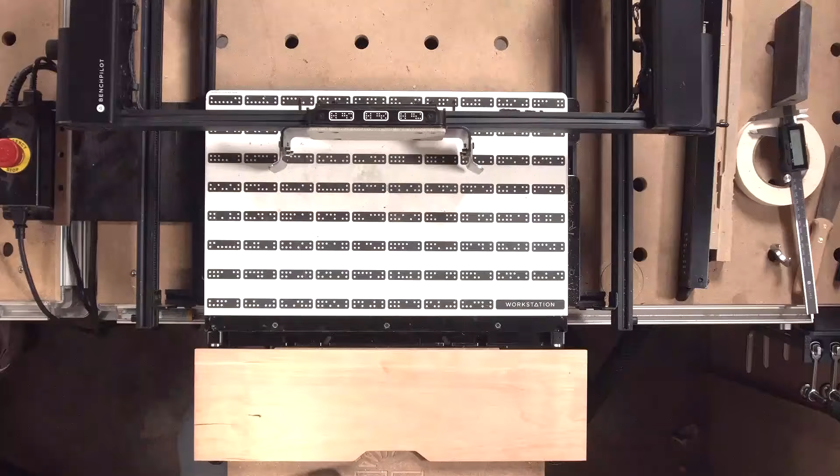So, start off, I've already scanned in my workspace here. What we're doing is we have a drawer front with this tiny little handle that kind of made it look like a manila envelope or something. We didn't quite like this design. It was a little too shallow to actually get your fingers in and open. We want to change that. So, first start with a scan.

Yeah, and this was something we built without Origin. This was just a drawer front that I cut and built in the wood shop. And then, let's say it's a prototype. We're digitizing it. We want to make a new one, but we didn't have the file in the first place. This is like a workflow to take something out of the real world and turn it into a digital format so you can reproduce that over and over with precision.

So that's the way I like to think of probe points: you're normally starting with something in the real world that you don't have the file for already. There's plenty of jigs, plenty of things where you just want to make sure you can map all of the features on the wood so that you can get it into Studio or other digital programs for further manipulation.

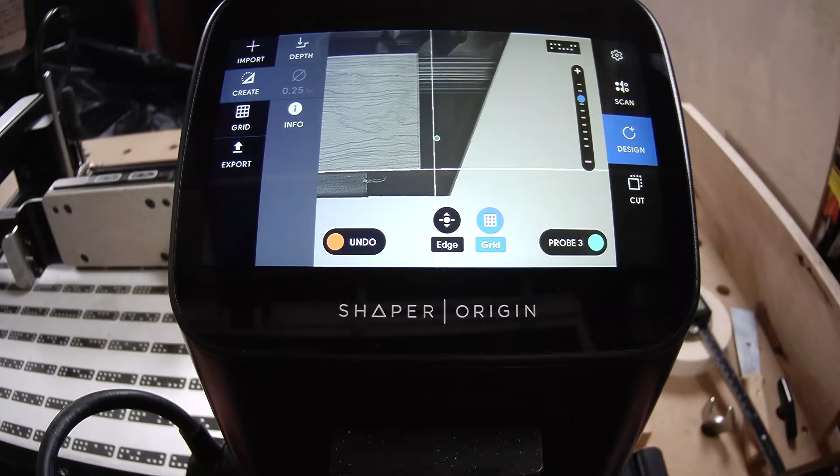Yeah. Okay. I'm going to start off with a probe rectangle just to find the exact center of my drawer box. Yeah, so here we're going to actually combine probe points with probe rectangle. And so we'll start with probe rectangle because that's going to give us the envelope of this drawer front. And it'll also put a grid in the middle. So now we have the boundary of that piece of wood plus the center grid, which is great because when we go to Studio, everything's going to be aligned real nice.

Now, the important part here is we want to use this new probe points feature. And actually, one thing we should note, probe points is a labs extension currently. So if you don't see it in that menu, you're going to go to the settings. Let's jump over there so we can show people how to get there. Go down to extensions and find the probe points thing. And you just need to make sure you click enable.

If you click on the name of the feature, then it'll take you to a page where you can click enable and then it'll show up on tools. So this is kind of an extra extension currently on the Oakland release. And all those labs features live under create.

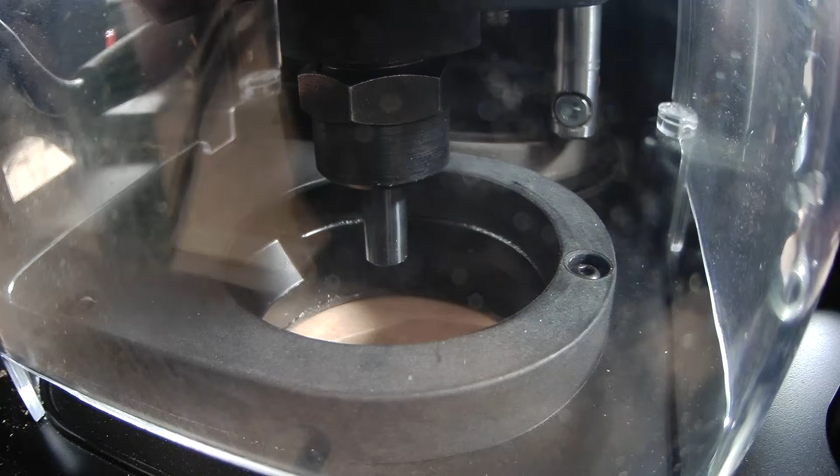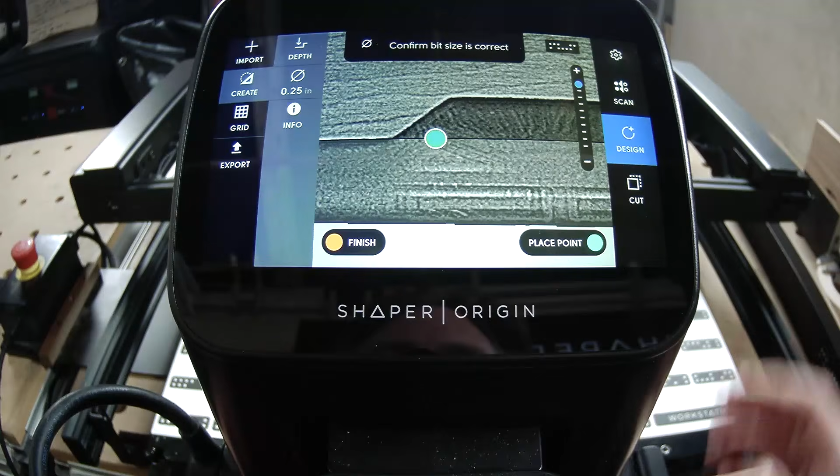So I'm going to start it off, much similar to a grid. I have our engraving bit in backwards, so it's just a solid 1/4 inch shank. And I'm lowering that down just below my surface. Yeah, and the idea here is just to take a bunch of points on these parts that weren't easy to use with probe rectangle. So this is kind of essentially a trapezoid.

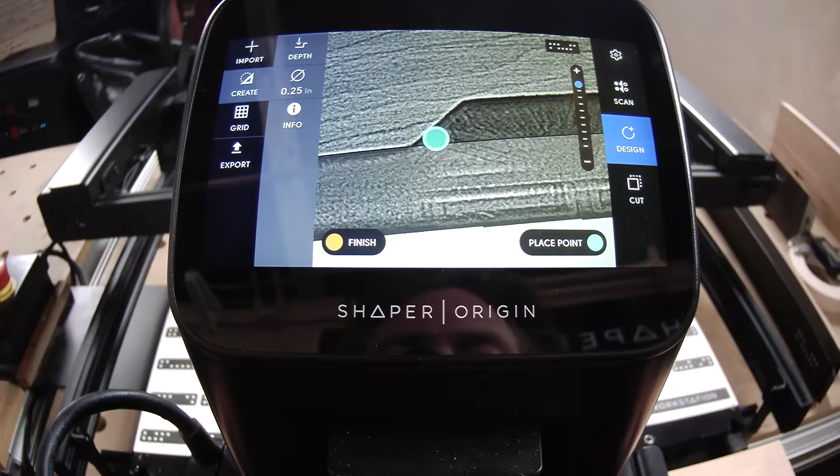So we'll essentially take a couple points along each line so that we can rebuild that and then get a change to happen in Studio to change the format of this shape without having to try to guess the alignment or figure out where these things might go. Taking these points out of the real world means when we modify in Studio and come back to Origin, everything's going to line up exactly where we want it, which is a really, really cool feature of this.

Sweet. So I got my 6 points down, really just 2 per flat section, so that I have 2 reference points for each straightaway. Hit finish, and use our export feature to send that over to Studio. Nice. Okay, so I'm just going to go ahead and load Studio on the computer. And it's going to load.

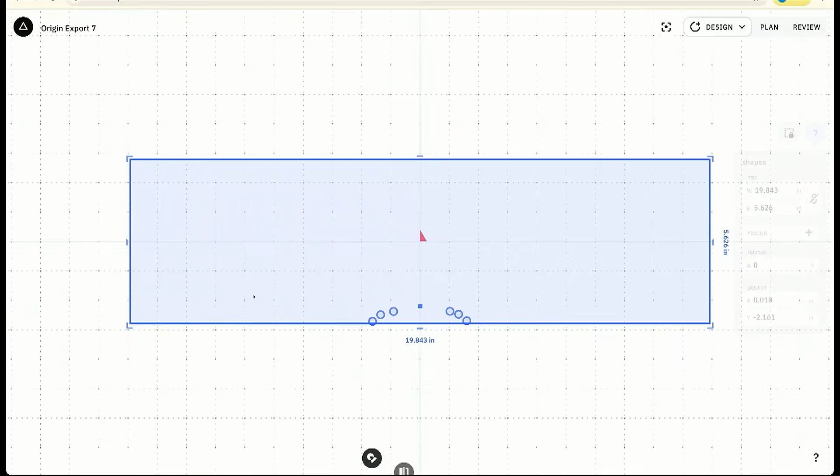And one of the cool things about Studio is it's going to load the latest file that's modified, because that was exported from Origin as a Studio design. If you just load Studio, this will be the latest modified project, and we can come in here and take a look at what's going on. So we have our rectangle that was created from probe rectangle, and now we have these points that were created from when Jake used the probe points feature.

Okay, so you can think of these as this was the bit that touched the material we have. So obviously, we don't have the outline of the handle yet, but we're going to basically rebuild that using the draw tool. So I'm just going to come over here and select the draw tool. And here's kind of my flow for how I like to do this. I know we touched the inside of the shape, so these are all points on the inside. So essentially I'm going to take these first two, and I'm just going to click a point here.

And now you'll see when I go to click, it's kind of snapping to things right now. I don't really want that right now. So I'm going to go up to design, and I'm going to turn smart alignment off. And that's going to allow me to click anywhere I like. So I'm going to pick this point right on the edge here, and also a point right on this edge. Okay, so that's going to basically create that line that's essentially that angle.

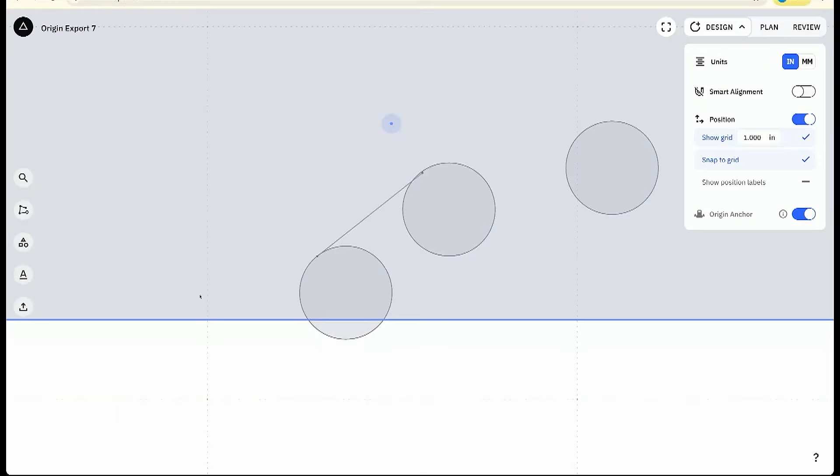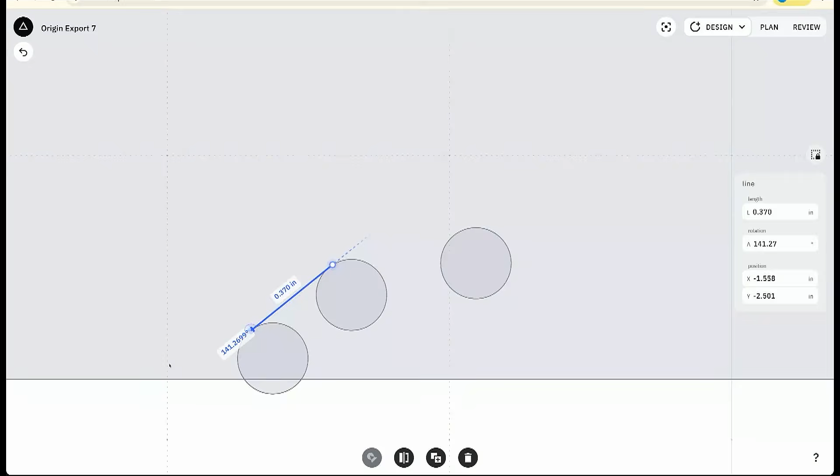And so if I hit escape now, the whole thing will get deleted. But if I click the draw tool, like the D key on my keyboard, it'll complete that shape. Okay. And now the idea here is I'm just going to move this to where it's touching both of these pieces. And now I just need to extend it on both sides. So there's a couple ways I could do it. I could go in here and I could drag this, and make it touch the corner. And then I could come over here and do the same thing.

Oh, looks like I got refresh. Let's come back to here. Let's go ahead and repeat that. I'm going to hit the D key to bring up the draw tool. Click, click. Hit the D key again to finish it. And now I'm going to hit the escape key to go into select mode. And that gives me this.

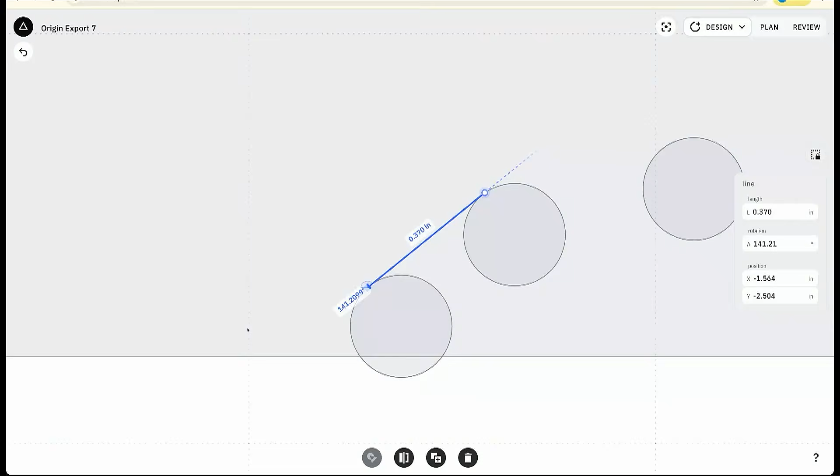So I can drag that out here. And then I can also drag this point out. And essentially, see how when I'm moving them, they're getting close to those corners. As soon as I get both where I want them, I just stop. And that essentially defines that first corner. That was where I was touching these 2 points here. So essentially, I'll do the same thing for these two here.

So I'm gonna grab the D key again, and I'll click here at the top, and I'll click here at this top. Now, I'm going to hit the D key again, and this time, instead of dragging each of these corners out each way, I'm going to solve it a different way. So I'll hit the escape key to get out of the draw tool. And then if I click the middle, you'll see there's a circle here, and a dot here.

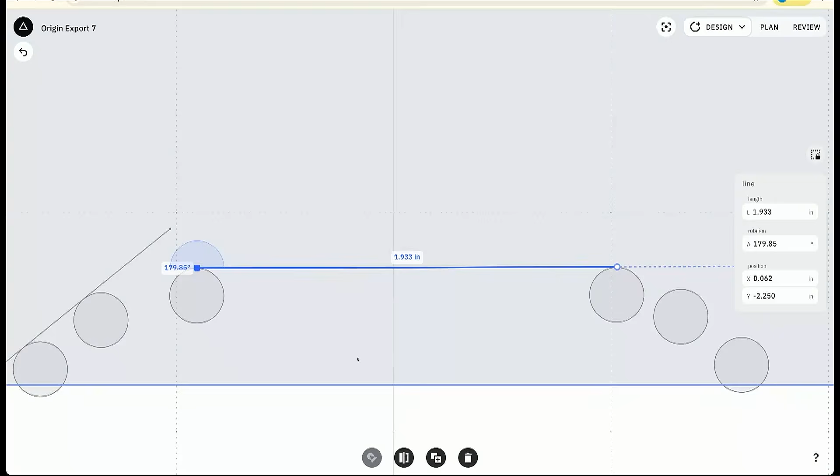Now, because this line's already defined by these 2 points, I can go over to here in the length column, and I can just make that a little bit longer. So right now it's about 2. Let's make it 3. What you're going to see is it's going to extend the dot out this way from the rectangle point. Now, if I click this again, it will swap the rectangle over to the other side.

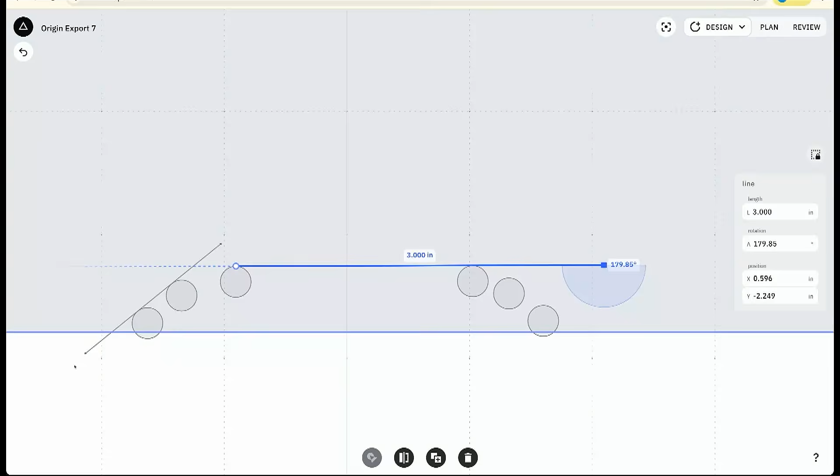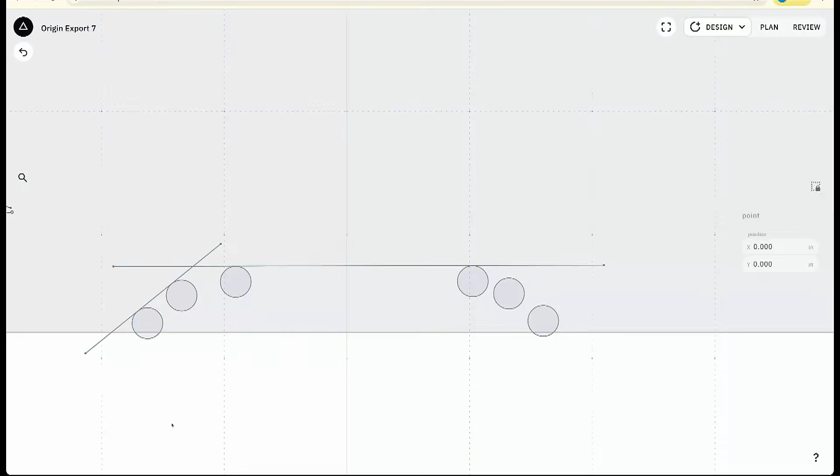And so now I just need to extend this point beyond that line. And you can see the invisible line coming here. And I'll just make this 4 inches. Okay? And so now those first 2 points I took, that line will not change. Whereas when I was changing these by dragging them, they could move a little bit. So that's kind of 2 ways to solve the same problem. Kind of up to you how you want to do it, but depends on the situation.

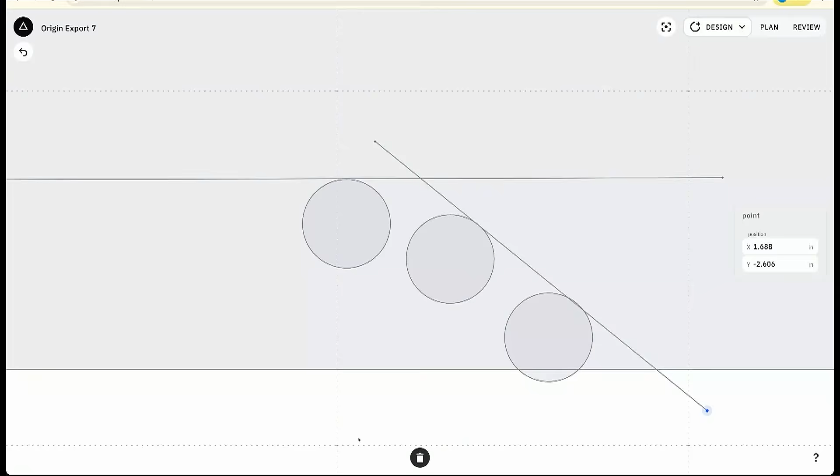Maybe both are useful. So I'm going to click the last one here and here, hit that D key again and escape. And then I'm just going to drag this one out to where it's perfectly in line, drag this one out to where it's nice in line, and then boom, now we have defined that handle region that was part of this. Nice. Right? So now we have a pretty great understanding of exactly where that previous part was.

So, if I wanted to make it bigger, or, in Jake's case, he said he wants to make the handle deeper, and he wants to change the profile of how it kind of cuts into this. We could do a couple things. We could take a circle and we could move that maybe like around here. Now I am going to turn on snapping again here, just so I get the alignment a little bit more where I want it. And now you can see it can help snap to things.

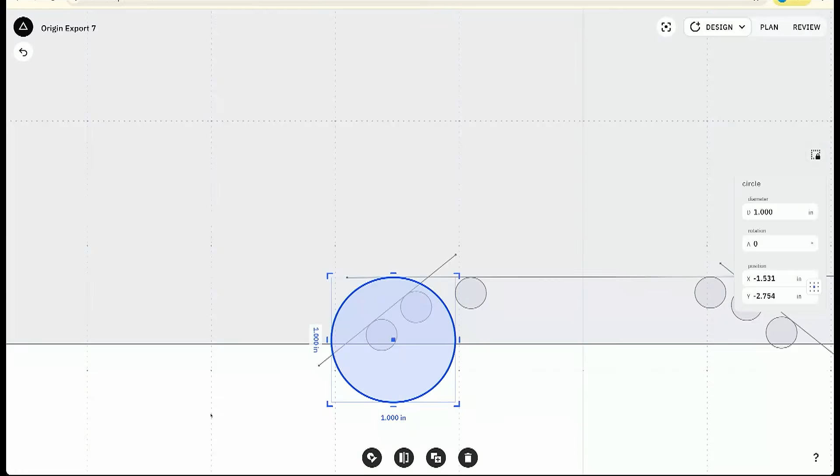And so maybe I'll do, do we like this kind of curve here, Jake? Where it's kind of getting a little bit bigger, a little wider, and then maybe we pull it up a little bit. I think that's perfect. Okay, so here's a good trick. Because we probe rectangle, the center of this piece of wood is at 0, 0. And now this circle is at

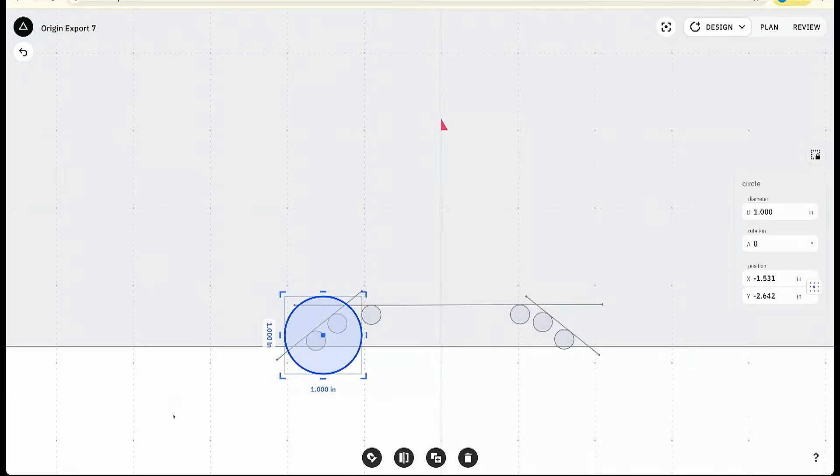-1.53 and -2.64. So if I want to put this circle over here and match this, I could duplicate this in place by going down here to this thing and saying duplicate in place, and that's going to put another shape right on top of this. And then if I just go to the X, and instead of negative, I make it positive, boom, it's going to mirror over across there, right?

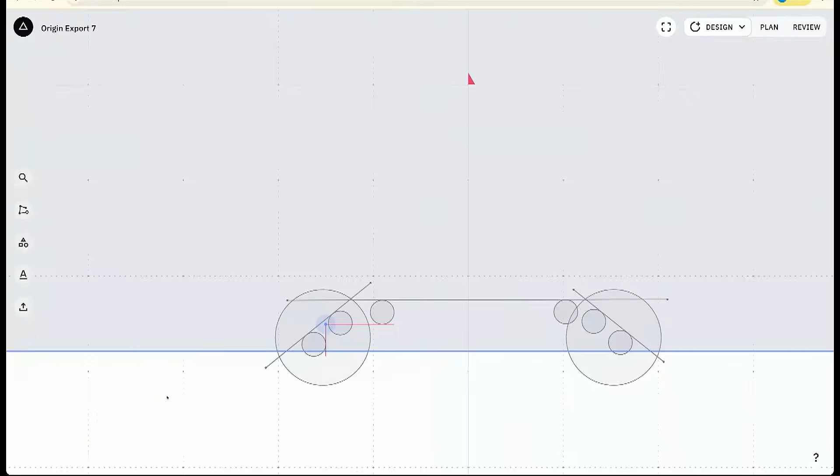And then now maybe I'll just take a draw tool and kind of pick a point here and pick a point at the center of this one and hit D to finish that. And now we have the ability to kind of rebuild this curve. So all I'm going to do here is select everything, hit Shapeshifter. And now you'll notice if you were recently around, Shapeshifter has a new UI. It's much larger than it used to be. So you can kind of see more what's going on.

And all I'm going to do is click and drag all the parts that I want to keep. And so I'm just going to come over through here, make sure I drag. I'm just holding the mouse key down to make sure it selects everything that I want. Okay, cool. And I guess if I was going to really do this, I would have extended the front here too, so that I kind of cut off the edge of the material. But you know, it's fine.

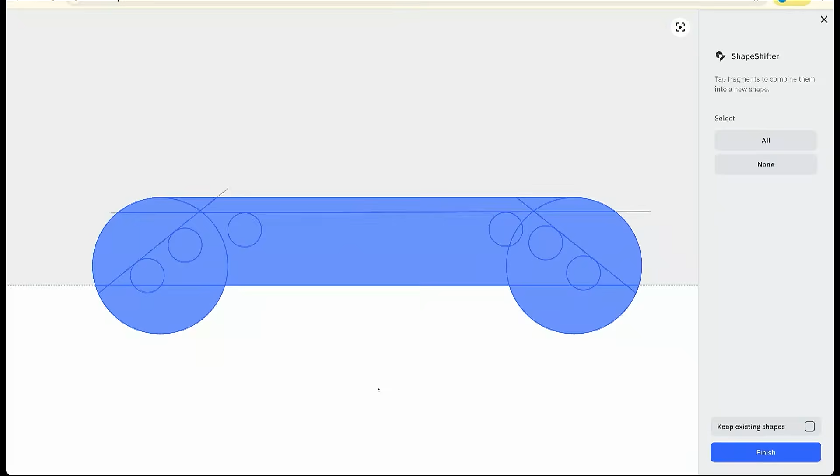We're just kind of showing you a demo here, and I'm going to say keep existing shapes because I may want to change that later. Hit finish, and now we have this new shape. And if we go to plan mode, we can kind of see if I make this an inside cut, what's going to happen. Oh, looks like I forgot one little part when I was adding it together here. So this is exactly why when you're doing this work, it's nice to keep the shape because you might have to go back and re-shapeshifter it.

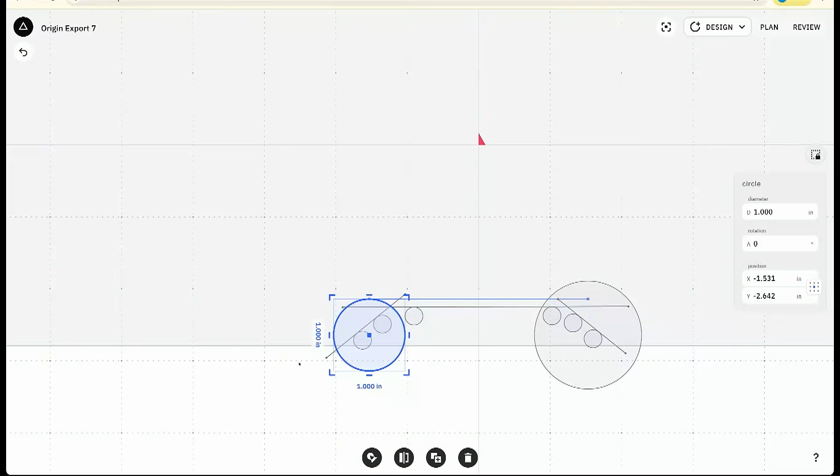I also noticed one thing I didn't like, Jake, which is the way this curve happens, it's going to come back in on itself. Mm-hmm. So to fix that, I'm just going to make the diameter a little bigger. Do 1.5, and I'll do 1.5 for this. And then I'm just going to kind of bring it down so that it intersects in the same spot. And that will give us a much nicer profile. Okay, make sure it's all snapping. Okay, great.

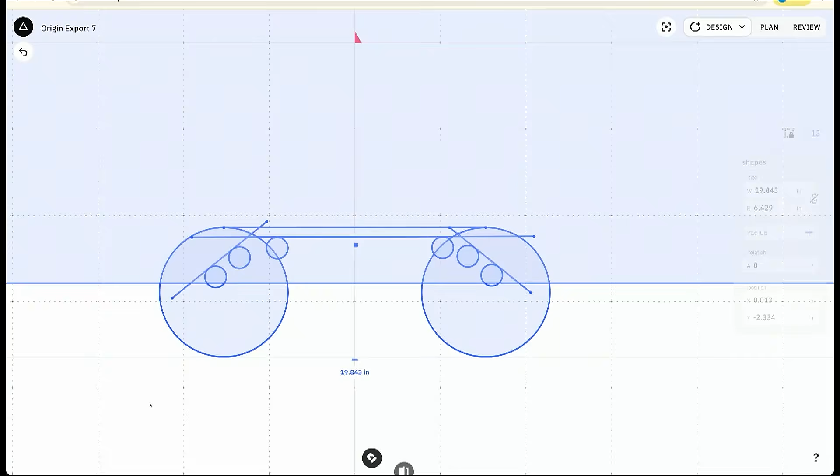Now, select all again. Go to shapeshifter mode. And now I'm just going to make sure. Actually, let's just do it the right way since I keep forgetting. I'm going to come in here and make another draw tool at the bottom just to connect these. Yeah, close it out. So that way I can have a full shape that comes off the edge.

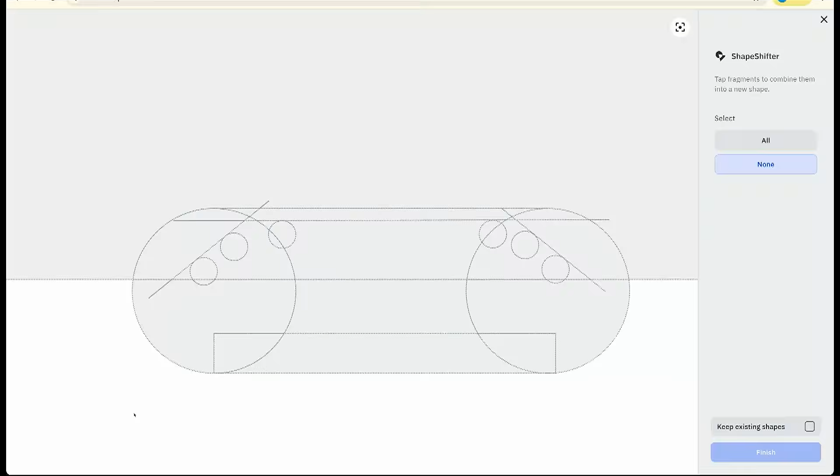Now we'll select all, hit shapeshifter, and I'm just going to drag select all of this. I really love this, hold the key down and do it that way. Okay. Oh, okay, so I must have had something that's not connected properly at the moment. Let me come back here. Probably when I made this shape here, it was not quite right.

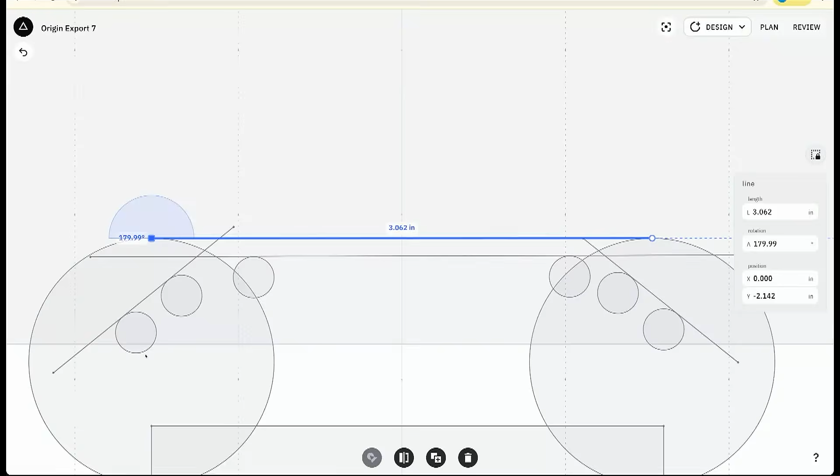So I'll do the little trick here. 3.5. Swap this to 4 so that we have a little extra on both sides. And let's try that. Okay, select all this. Nope, still missing something. Okay. Just think of it like there's a leak somewhere in the shape. Yeah, it's like if you zoom in, these are not really connected.

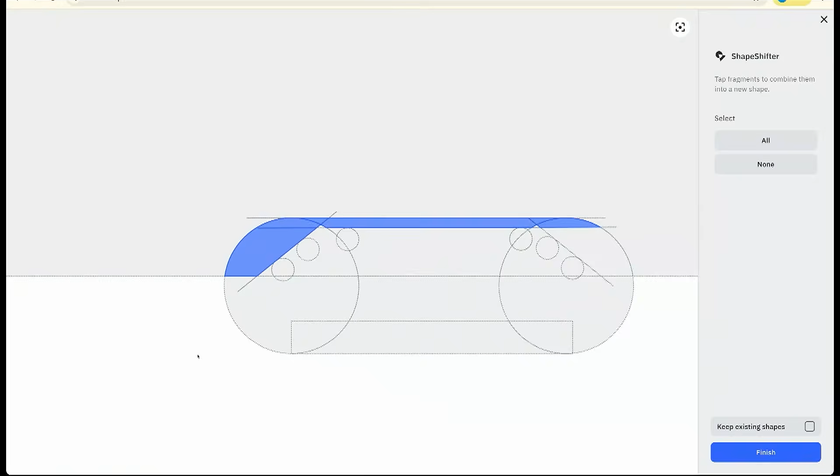So maybe I'll just bring it down just ever so slightly with using the arrow key, one little click, and then that should do it for us. So if you ever get in the case where you're shape shifting something and it's not actually selecting correctly, yep, there we go. See how now those things are intersecting properly? So you can just kind of go through there and figure out what part isn't actually connecting.

Okay. Remind me that hotkey for select all that you've been using. Command A will do that for you. And then I really love this select all where you just click and hold the mouse and drag through and then keep existing shapes. Boom, we have this nice shape that's going to be right in the right spot.

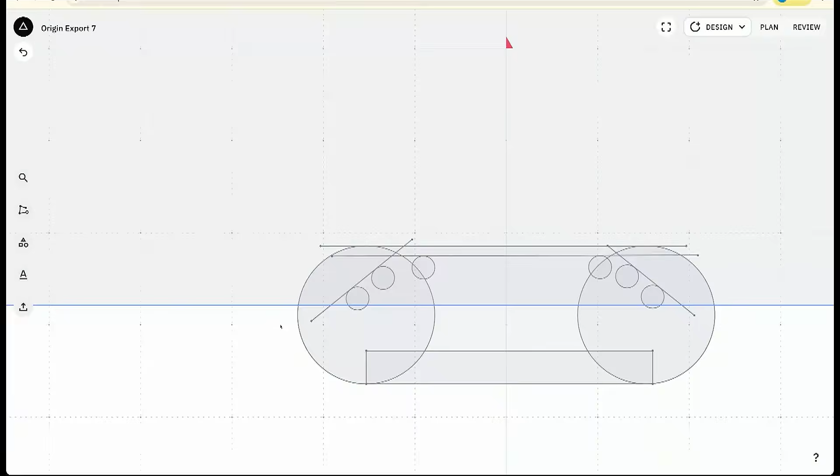I'm going to go ahead and turn everything into a reference path. And this is going to essentially make sure I can use it later but not get rid of it. And then I'll just come back and find the shape we want to do and turn that only into a regular cuttable path. Turn that into an inside cut. We got a what size bit? 1/4 inch? 1/4 inch.

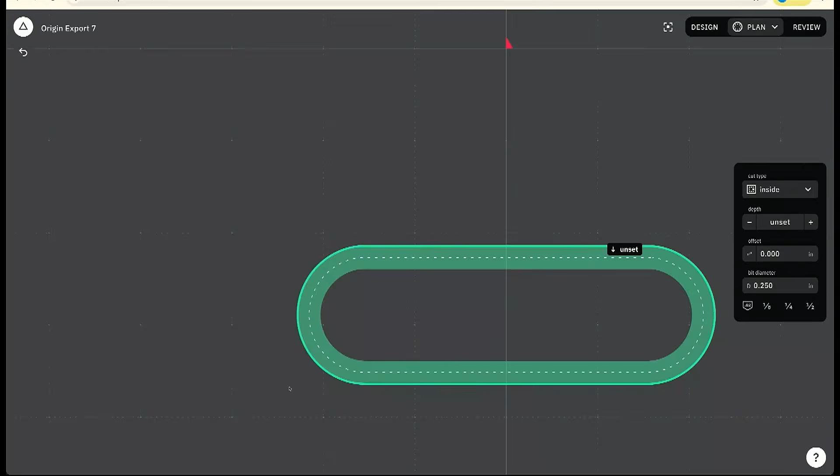So there's our preview. And now the beauty is because we started this on Origin with the probe points, we can go right back to Origin and import that shape. And it's going to basically put it exactly where we had it. And so this is kind of one of the beauties of using the probe features on Origin with a grid.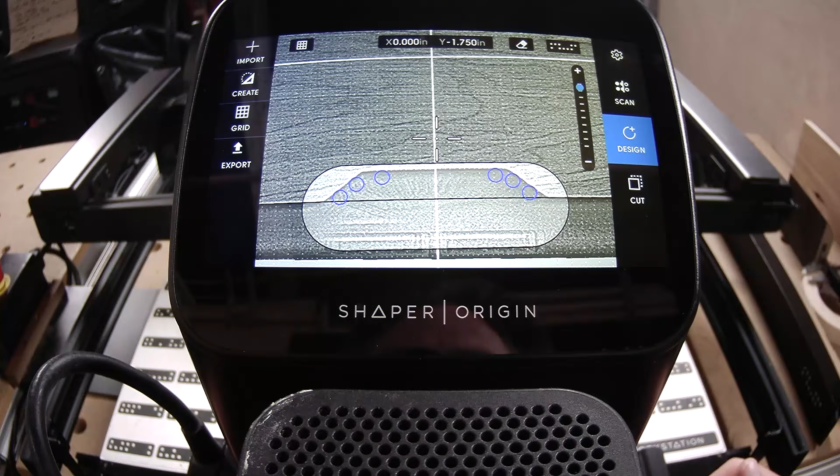Now all Jake needs to do is put that specific anchor back at 0, 0. And if he zooms in, you'll see in a second, basically that shape is going to be right outside the previous shape. And then he can just get to work. Great. So we'll quickly cut that and show you how that looks. And I hope that was a nice, fun version of Studio. Maybe a little more than we normally do as far as how to use Studio, but quite useful when you're in the mode of how do I fix this issue.

Okay, so Jake's just gonna go and he's bench piloting. Very nice. So yes, so now basically BenchPilot's going to do its thing and go around. Now you're going to notice a new icon at the top, which is the adaptive speed feature. So he's kind of getting ahead of the curve right now. And you can see as we go around, it's just going to slowly, but we're going to go over adaptive speed after this and show you a bunch of fun features that are related to that.

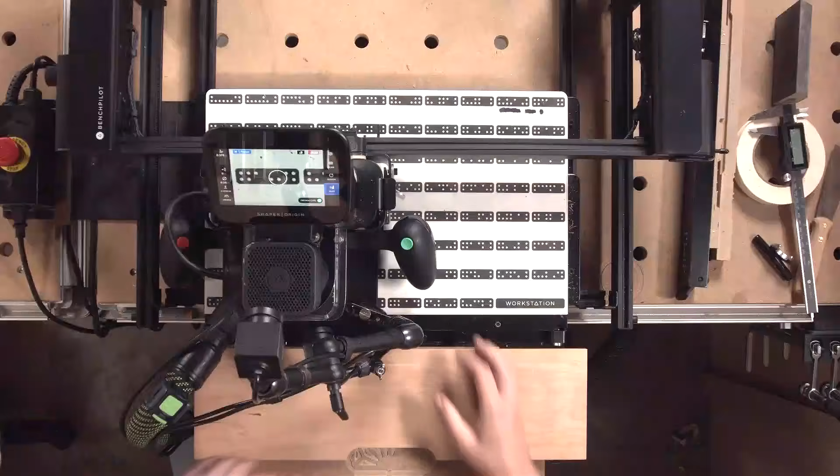But this is a pretty good example of how you take something that you didn't previously cut with Origin or even have files for and map Origin and the design software to it. This is pretty unique. I mean, taking something existing and have it perfectly line up is just not something you find in other programs, products, etc. So this kind of world where you're moving between the digital on Origin and Studio and into the real world is something else. So, boom.

So we go from that kind of different design to this without having to throw this piece away and start over. I like that. And it's ready to do all the rest of the drawer fronts. And we could take that same file, and now we put that into some system where we do repetitive cutting over and over, which I believe, Jake, we have a show coming up about some advanced fixturing in the future. Yeah. So maybe we'll use the same one.

Okay, so that's the probe points. A general workflow of using Origin to probe, coming into Studio, doing modifications and kind of rebuilding that design based on what you probed, and coming back. Now, obviously, the first question is, well, don't you have another product that does this called Trace? And yes, there is that product.

And we always say, you have choice. You can use that. You can use this. There's so many ways to do the same type of thing in woodworking and even with our tools. But sometimes you might be in the middle of a project and it's faster to probe and make those changes in Studio, sync them over, than to get out Trace, draw it, whatever. Also, you might have something really big. We have a blog post that went up for Oakland. Maybe while Jake's resetting up, I can pull that up.

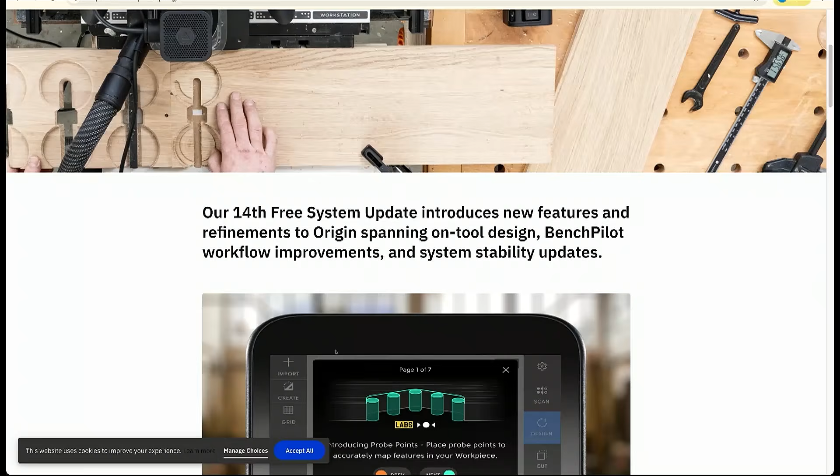Okay, so I would just show you this in case you haven't seen it because it's a more condensed version of the session. We have a blog, search blog/Oakland, and you'll see it. Basically, we go into some detail, which we're going into here. Here's one where there was a large wooden template, and we used the probe points to collect a bunch of points along that. And so here you can see we're lowering the bit down, touching all those edges. And then when that's complete, we export that to Studio and then rebuild that shape.

Then you have a template. So you may have a bunch of wooden templates in your home that you didn't build with Origin, that you built years ago. If there's an issue with it, if you break it, you can rebuild that in Studio based off your existing templates, even if you don't have digital files in the first place. So just another way to get your ideas into the brain of Origin's file system. Okay, so that's a cool one.

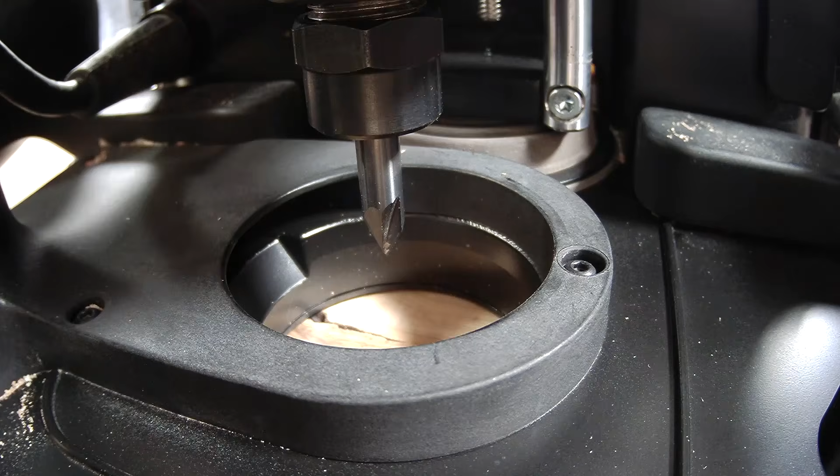So the idea here is that we're going to use the point of an engraving bit to mark our probe points. And instead of using the screen, we're going to actually just look underneath the bit, and we're going to lower the bit point right over our material. And now Jake's going to take a bunch of points by looking through the bottom around the area he wants to plug. So he's just going to take as many or as few points as he wants.

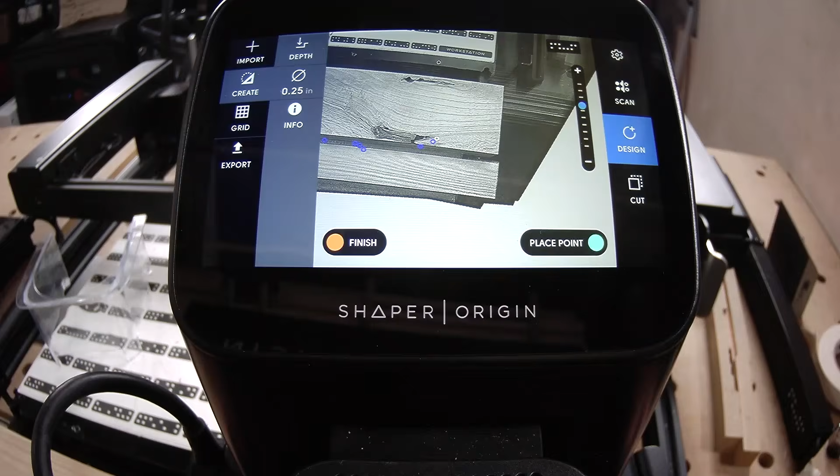And the beauty of this is we're kind of ignoring the screen right now. We don't care about that right now. We only care about the bottom part. And this is going to help us fix that screen alignment. So if you used Origin in the past, the screen is good up to 1/4, 1/8 of an inch, depending on a bunch of variables. Sometimes better, sometimes not great, depending on your application.

But when you use the engraving bit to probe, either by using a grid or using these probe points, everything's going to be lined up perfectly, okay? And so you can kind of see even when we look at the screen now where the dots lined up. And sometimes those dots will be a little bit shifted off your image, but you should trust the dots, not the image, okay? Yeah.

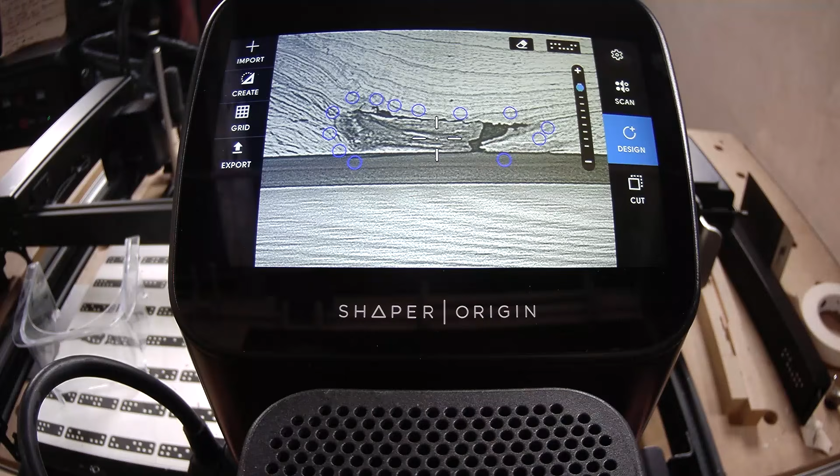Okay, so Jake probed out where he wants, and you probed the center of the thing. So we don't actually care about the outsides of these points. We only care about the insides, and that's going to be an important distinction here. So let's go ahead and export that. First, I need to create a quick grid, and I don't care about the actual edge of this. I'm going to do what we call a double tap grid.

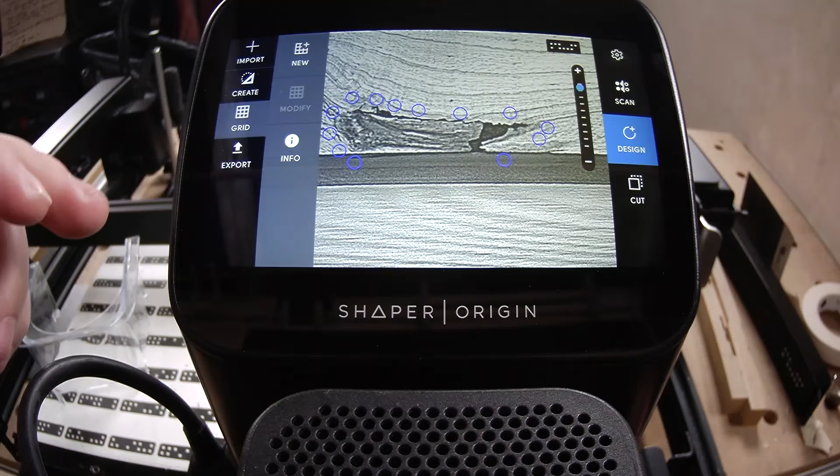Yeah, anytime you want to bring files from Origin up to Studio, then back to Origin, you really want to have a grid. And the beauty is you don't really need to care where the grid is. You just show this method where you double click. Boom, and it's going to make a grid that's roughly aligned to how Origin's looking. And that's just going to let us sync the files back into the right spot later. Get rid of these old ones for you.

Oh, you didn't make a new scan? I didn't. You're a little rusty, Jake. Rusty and trying to be quick.

All right, I'm going to export this for you. All right, bring it up.

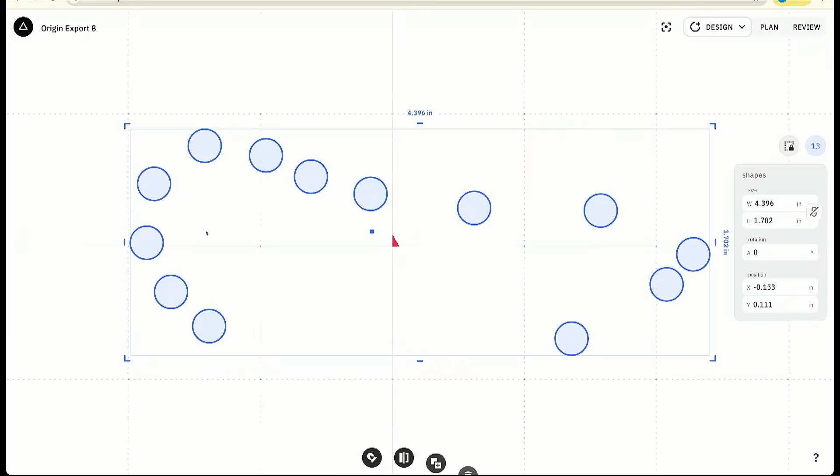Okay, so once he exports it, I'm going to go to the computer and reload Studio. It's going to automatically pull up the latest file, which in this case is here. Now, this might not look like much, but because Jake used that engraving bit, I only care about the center. I don't care about the edge probes because we were using the center of the point.

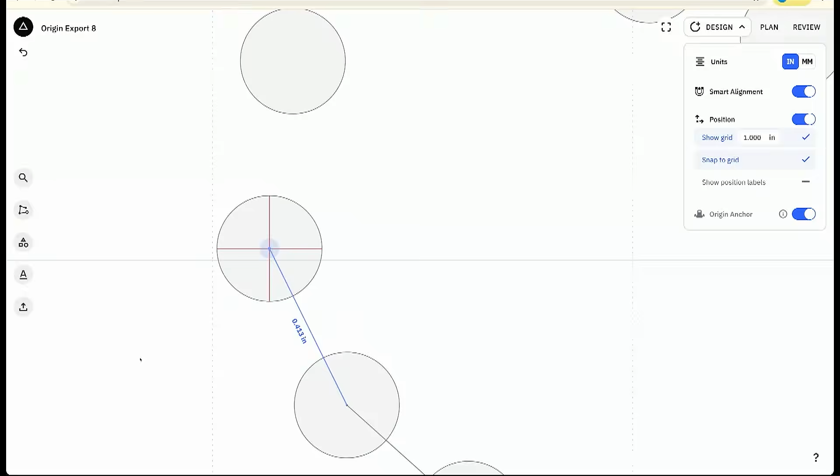So I'm just going to take the draw tool and I'm just going to make sure that my smart alignment's on. And now when I use the draw tool, you see how when I go up to here, it's picking the center of this circle automatically. I'm going to go around and make a layout that matches exactly where he probed, okay? And I'm using spacebar to move when I don't want to click. If you hold down the spacebar, you can drag your view around.

Okay, so there's the center. Here's the center. And you can see it's the center because I'm getting two red areas showing up, and that shows you're at the center of this bit. Okay. And then I'll keep coming around here. And then when I come to this last one, it's going to connect. And you see how when I get to the end, it builds that shape? So this is exactly the shape that Jake probed out on the center, okay?

Which is great. Now, all we need to do is use that brand new feature in Shaper Studio, Radius, to add a radius, so when we make the plug, everything will fit. So, Jake, what size bit are we going to use? I'm using a 1/4 inch bit. Quarter inch. Okay. 0.13 inch radius. Great.

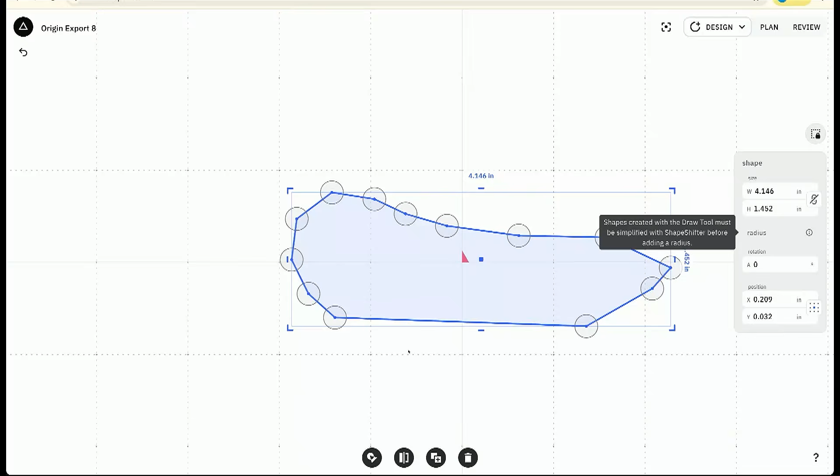Okay, so first step, I'm just going to select that shape I made. And if I go to the radius tool, it doesn't let me do anything. But if you notice when you hover, it says shapes that are created with a draw tool must be simplified with Shapeshifter before adding a radius. So I'm just going to do that. Click Shapeshifter, click the middle, hit finish. And now the radius tool shows up.

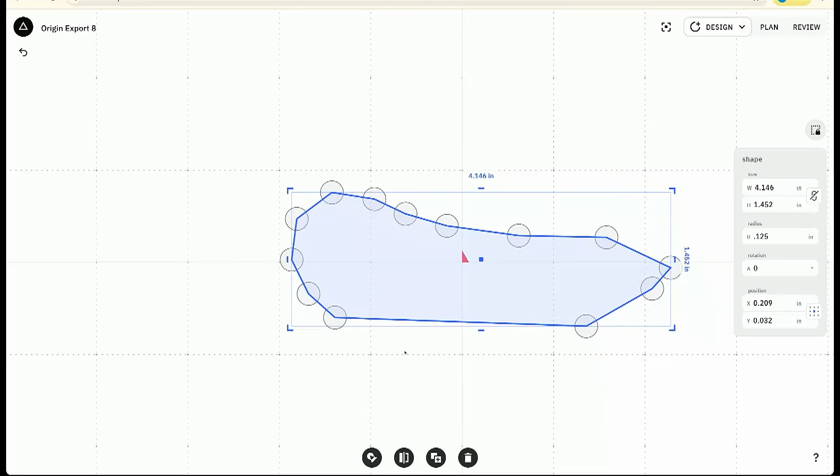Okay, so now to add a radius, I'm going to click that button. And then what is the radius? It's half of the bit diameter, essentially. Yeah. So if we're using a 1/4 inch, I want to be 0.125 or larger. Is that correct? Yeah, I usually go 0.13. Okay, so 0.13. Jake says it. It's his day. He can pick what he wants. And then, boom, now that is going to be radiused for that size.

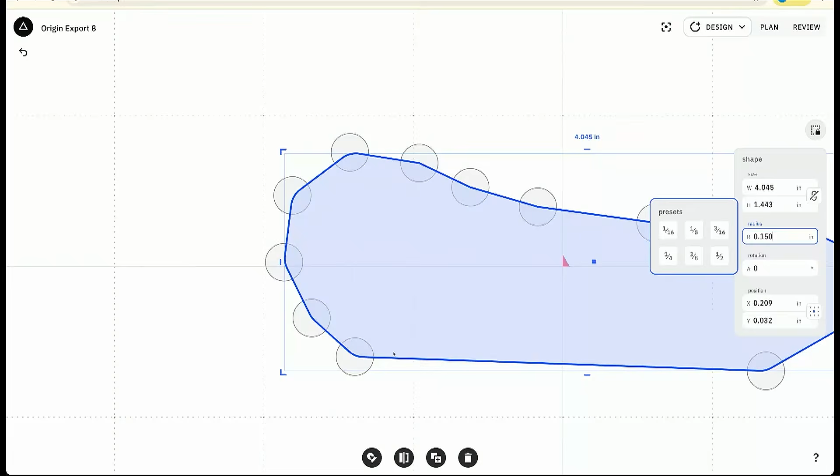Now, if you wanted it to be more curved, you can see here it's a little tight bend here. Obviously, you could come back here and change it to 0.15. The larger you get it, the more you're going to have curves. But, yeah, keep it 0.13. Jake's in control today. Okay, so now this file here is good.

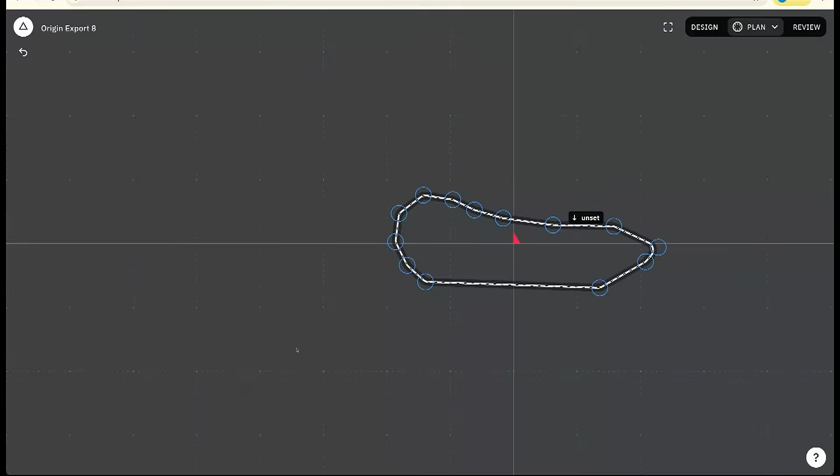Now, probe points automatically come into Studio as guides, so they're blue. So we don't have to worry about them. We just need to worry about this here and here. Turn this into a pocket. And then how deep do you want it? 0.3. We'll just click and make it 0.29. 0.29 deep. Okay. All right, so there's a 0.29 pocket. Excellent. And we're ready to go back to Origin.

Grab it in my import list, and there it is, top of the list. Drop it at 0, 0. And make sure that when you import that back on Origin, in that left-hand corner, you see that little red triangle where the anchor point is, because that's going to make sure that it imported the file that came off of Origin. Right here. Correct. But it should do that basically automatically. But if you don't see it, make sure you go into Studio.

And if we come over to Studio real quick, I'll just show you if that's not showing up. So you'll see a red triangle here is great. But if I come to design mode, you'll see this new option, origin anchor. Turn that off, the red triangle goes away and it'll import like normal. Make sure that's in the on mode with the red triangle to get the file back and forth properly.

Nice. All right, I'm going to cut this twice because we're making a plug. And we just created this file. So I'm going to copy it and drag it down here into my piece and cut the plug out first. We should explain just so people know. We were going to do this plug over here, but we didn't have a lot of room. So we're doing something that we don't normally do.

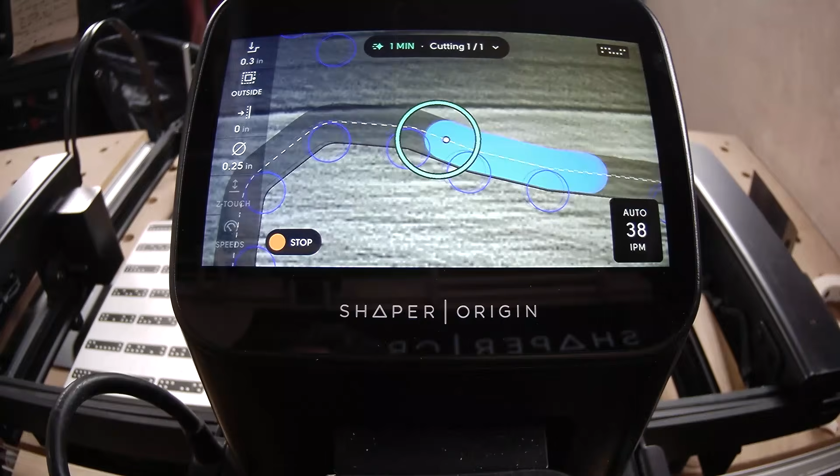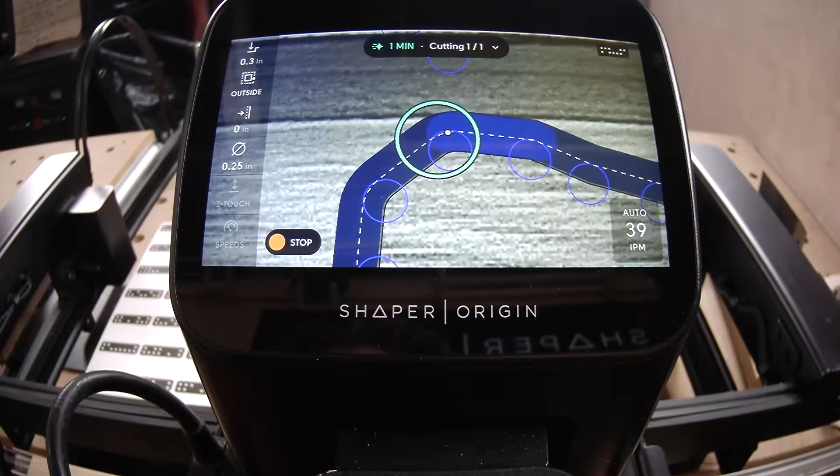Now, I guess while we're cutting this, we got a couple minutes for this one and that one. We haven't really talked too much about adaptive speed, but that new icon, as I mentioned earlier, is new, and at the top of the screen it's going to tell you we're in adaptive speed mode. And adaptive speed mode is essentially going to take a look while it's cutting and say, hey, how fast should I be traveling around turns, around corners? And it's going to slow down, essentially, if it detects any of those.

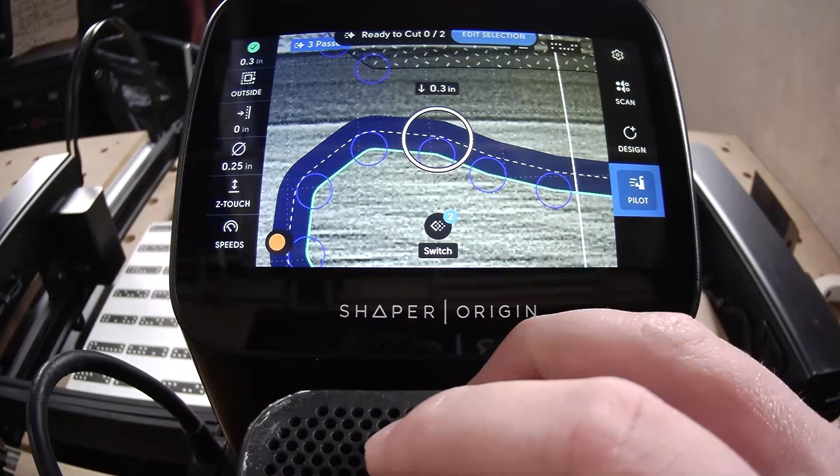So that's why you can see right now where it's actually slowing down a little bit at some of these turns to try to get a really nice cut quality for us. Now, this feature, we'll show a bit more in a second. It's not actually activated by default, and we'll show you how to activate that. And it's not always the perfect feature to use when you're cutting specific things, but in general, we're using it quite a lot. And while Jake's doing this, I realize he's already in adaptive speed mode. So I guess we'll talk about it a little bit.

Oh, he's deciding. Let's see. Yes or no. Yes or no. Okay. He's going no. Okay, so we'll hold the rest for the next little session. Here he's selecting the other side. And now we're just going to pocket this out. So Origin's going to blast through this little area.

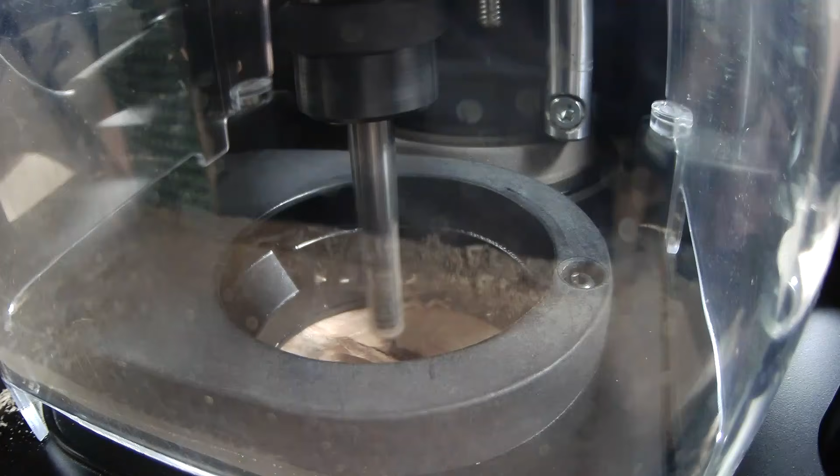If you haven't really paid attention to BenchPilot and you're normally using Origin manually, BenchPilot's automatically going to create regions for you for pockets, and so you don't really need to think about how it's going to clear that area out. You can just tell it, hey, cut this pocket, and it'll do all the heavy lifting of figuring out what should be cut and what shouldn't be.

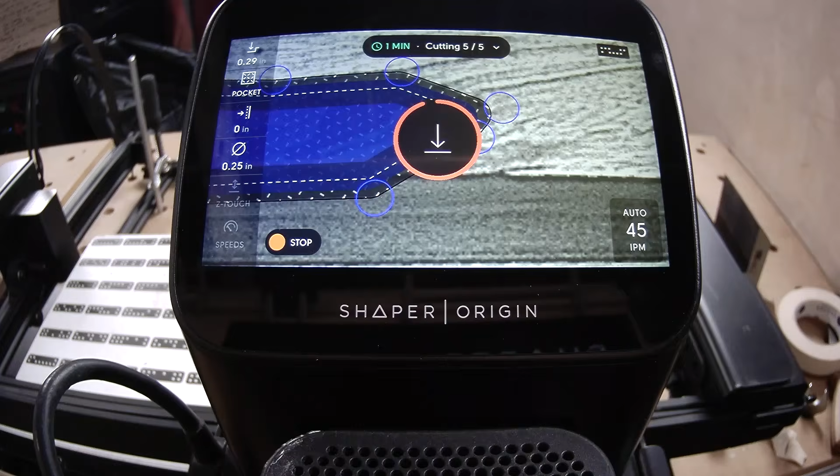You'll notice also Jake cut the plug first, and so we always suggest this if you're new to Origin and you're trying to do an inlay or something that fits. It's always easier to cut the plug first, because you can always make the offset larger on the piece that's mating with it. And so, we're going to cut this to 0 as offset as he's currently set up. But when we go to try to fit that other piece, we might back that off so we get a really nice, clean fit.

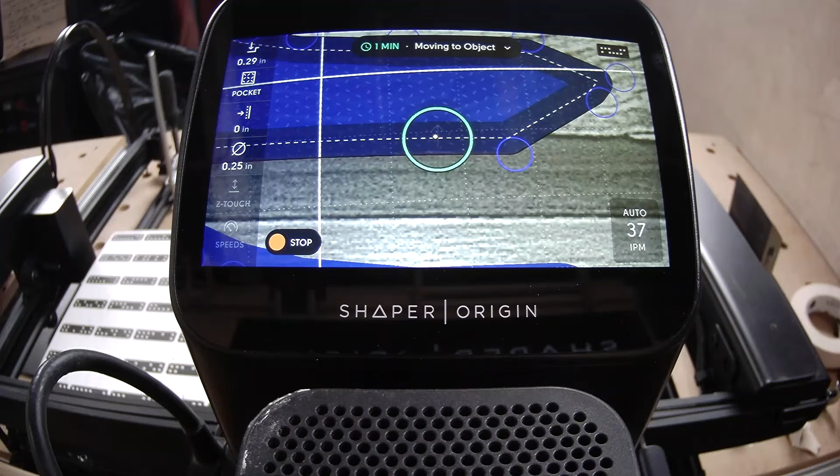But after BenchPilot finishes pocketing that area, it'll go around and do kind of this final cleanup pass around the entire area. And what you'll notice is when we turn that adaptive speed feature off, BenchPilot is just going to drive at whatever speed he has it. And so it's not going to slow down for those corners. And so, there's some trade-offs with how you use it.

So, okay, Jake, how are we doing? Doing good. Just popping off that plug that we made so I can do a test fit. What do you think? It's going to fit? 0 to 0? Doubtful. I'm surprised you didn't go for it on the first one. 5 thou negative. Like you said. I'm rusty, but that actually is perfect. So that's why. And there we go. Oh, yeah, look at that.

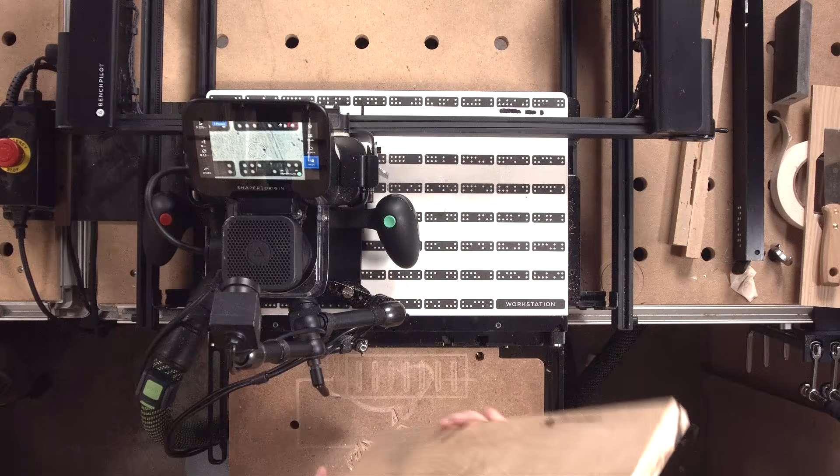Okay, so that is a little workflow for surface probes. Maybe pull that out so we can show it off. Top cam. So now we have plugged an area that was defective. And boom. Yeah, looks great. So, that's the other way to use the Probe Points feature. So, yeah. That's a fun one. Yeah, that is a fun one.

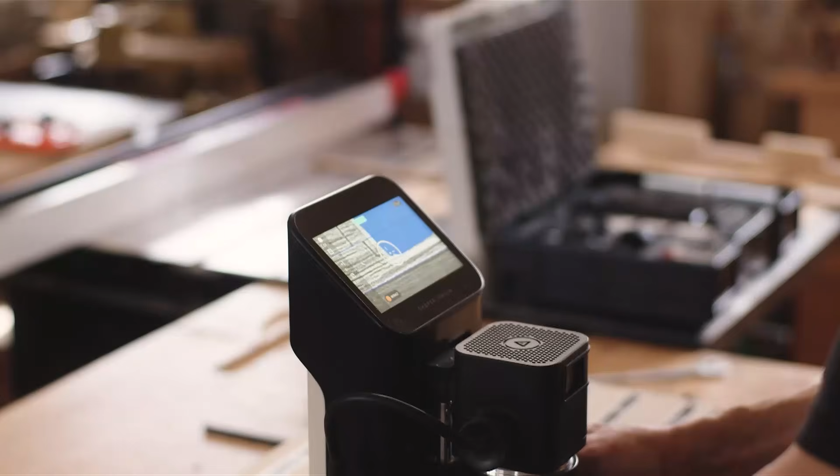If you hear that sound, it's not really cutting, it's just creating a series of indents. If anything, think about unweighting the saw. In practice, just skimming the saw above the surface. For most of us, this notion of combining machine and handwork, it's a natural thing.

If we assign equal importance to every single task in a project, it may leave us lacking the bandwidth and energy to really pay attention to what is important. This has to do with this notion of equal versus exact. The fact that they're equal in width is far more important than whether they match any dimension exactly.

I think there's an intrinsic humanity to craft in that what we're making are useful objects, and that the things we made will be used by others. That drives everything I make.

I cannot tell you how excited I am for this one. This one's going to be quite good. Yeah. As they all are.

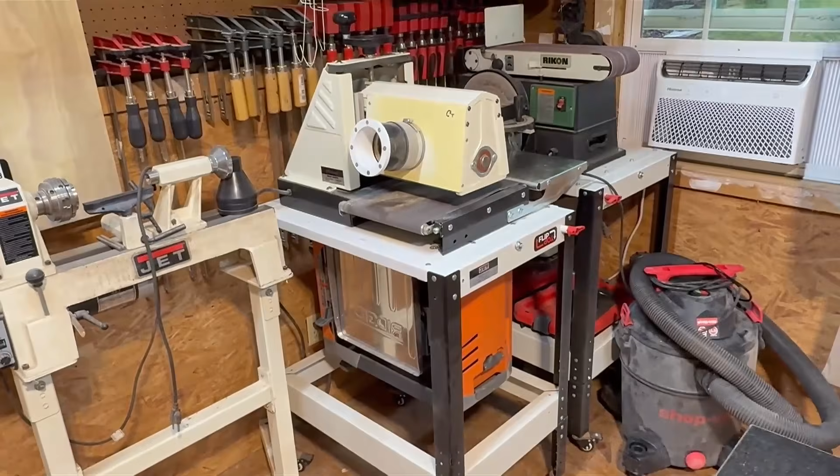Then I've got these rotating tables which hold my drum sander, belt sander, a planer, and a reciprocating sander. So you just flip them over if you need the tools. All my clamps, air conditioning for summer, filtration system or vacuum system, router table, slab planer. That is the top I made for my table saw, which is here. And that's a workbench I'm making for my granddaughter, once again made on the Shaper. That was my second project after the boxes.

All my wood blanks for turning. More wood. I have lots of wood. And that's it. Hope you enjoyed the tour.

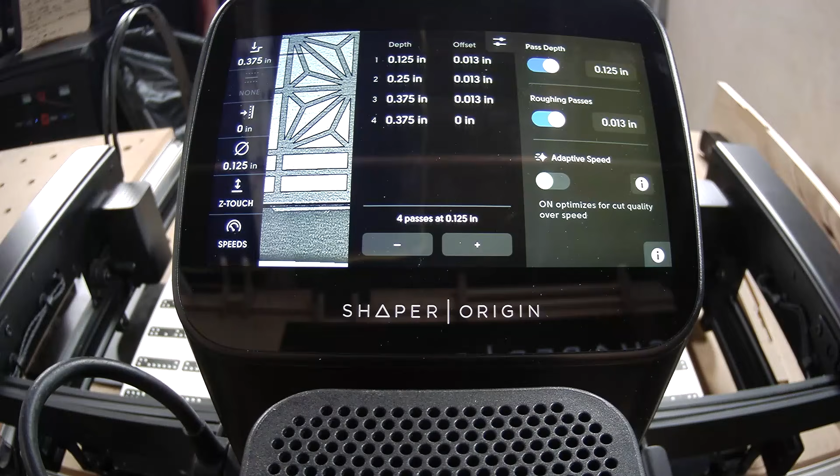So we're going to quickly do a couple cuts. If you've been around for a while, we have this premium project called the lattice lamp, and it has a bunch of intricate Kumiko-like shapes that are cut. If you cut this too fast previously, the quality would not be there. If you turn adaptive speed on, no matter how fast you run it, you're basically going to get that really nice quality you're looking for.

So Jake's going to go in here, select a couple shapes, and we're going to cut these without adaptive speed. So that seems good there. And then we'll come back and we'll cut a few with adaptive speed, and you're going to see a couple things. Not only the cut quality, but you're going to see how BenchPilot and Origin are working differently now. Full speed ahead, too. We're going to go 45. Okay, so he's going to go 45.

Now, you don't have to go full speed if you don't want to, and you are going to need to figure out a trade-off between your bit speeds and how fast you're moving Origin with your spindle speeds and your material. But for example, we're going to show 45, which is the max speed.

All right, so you can see here as we cut this, we're just going to be blasting through those corners. And you can even see there's a little bit of recoil in the way that the camera's moving because we are stopping and starting BenchPilot so fast. So maybe if we go to that top cam, we can even see if you watch how Origin's moving in this way. It's not slowing down. It's just driving full speed ahead.

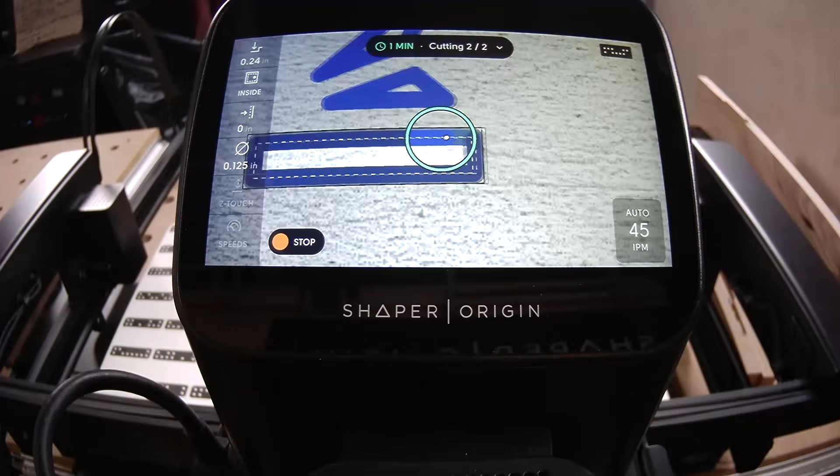Okay, and then he's going to do one more, which is this rectangle, and this is going to help show us this as well. These inside rectangles are kind of the areas where you see the most issues normally if you're running too fast or your material's too hard or you're being too aggressive with the amount of cuts. So typically people that wanted a very, very high quality would be having to run at a little bit lower speed than ideal.

So Jake's going to kind of move that out of the way, and we can kind of see what we're looking at here. And maybe we'll just wait until we do the adaptive speed version to kind of compare them. But let's go ahead and turn on adaptive speed, Jake, and show people how to do that one more time. So we're going to go into that setting, turn that on, and then we can just exit.

Now Jake's going to change his selection. So we have these ones right across it. And then you'll see there's a new icon on the top, and that lets you know whether the feature's on or off. If you see the icon on the top, that means the feature's on. If the feature's off, it's not on, okay? And then he's going to let it rip. And so let's watch what happens here.

So you can see, even though the speed says it's at 45, we're not actually traveling at 45, okay? It realizes that, hey, these corners are quite tight, and I cannot approach them that fast and get the cut quality that we're looking for. So it's going to kind of manage that for you.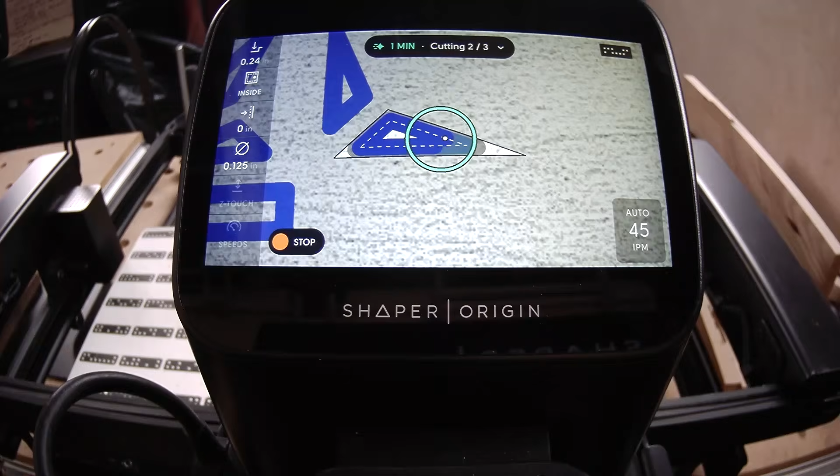Now, obviously, there are going to be some cases where if you're cutting with a very specific material or bit, like let's say plastic or aluminum, you're going to need to manage your speeds and kind of work between that high and low. But even if you were running at 20 inches per minute, it would try to run at 20 inches at the max and then slow down for those corners.

And so here, let's watch on this screen here. As we kind of head into this corner here, it's going to slow down and go that corner. And then when it continues, it's going to speed up and then sense that corner and slow down and then move along. So this is a feature we've been really excited about for a while. And you know, sometimes software and testing just takes a bit, but we're happy to bring it to you. And it will get improvements.

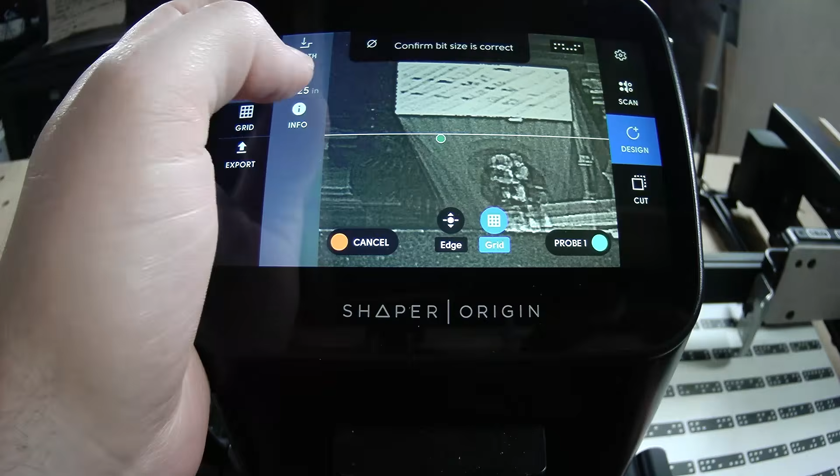And so it's pretty simple. The way it works is, and Jake's going to go ahead and set this up, there is a feature under the pass settings of BenchPilot. And I meant to say from the beginning, this works in manual mode and BenchPilot mode, so you don't have to have BenchPilot to do this. Basically, if your pass depth setting in AutoPass or BenchPilot settings is off, it's going to plunge to whatever depth you put. And if the pass depth setting is on, then it will just ramp like normal.

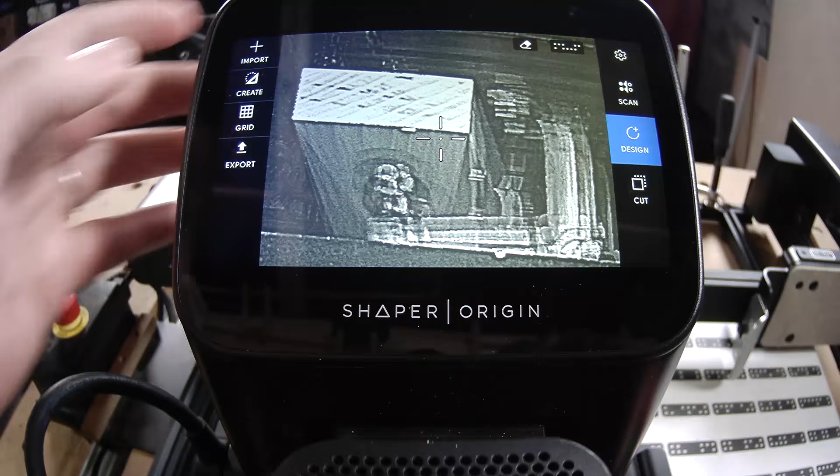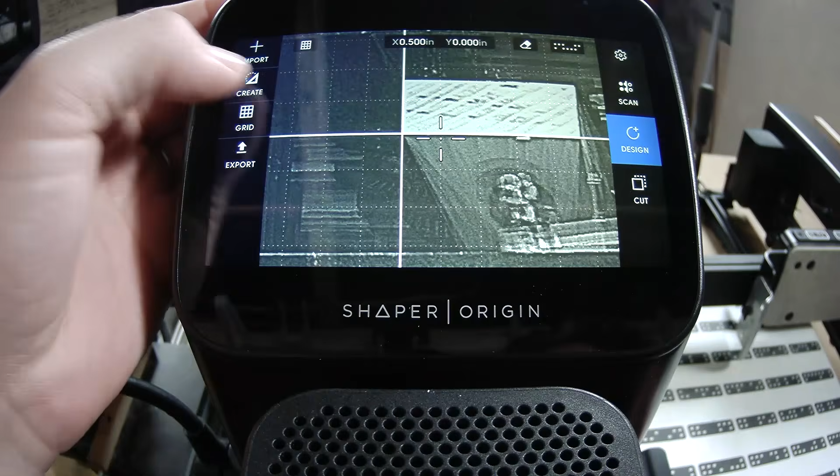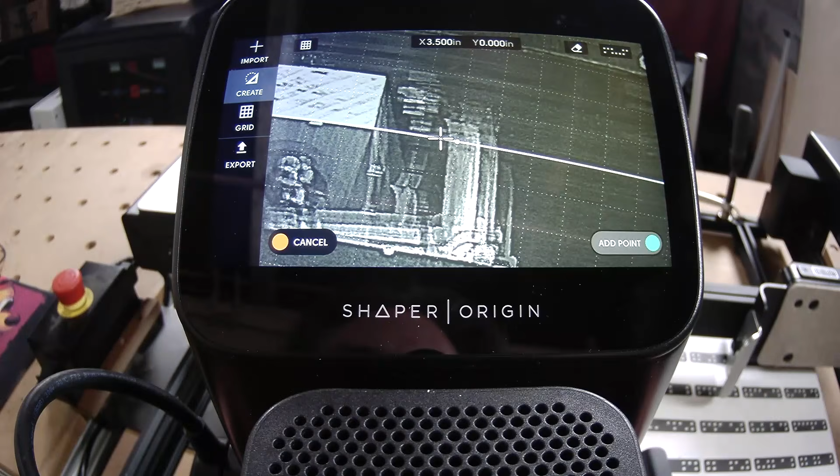And the main thing this feature does is eliminate how far you have to cut into a shape before you're at your final depth. And so Jake just put a little line on the outside of this material, and there we go. Okay, so if we were to cut that, we're going to do two things. We're going to show how it would happen if we were ramping, and then how it would go if we weren't ramping.

And the way this basically works is when you're in the cut settings in this AutoPass mode here, if this feature for pass depth is on, the ramp is going to be enabled. If you just toggle this off though, no ramp's going to occur. So in the first one, we're just going to turn that on so we can show you how it used to work. And then we'll show you the changes.

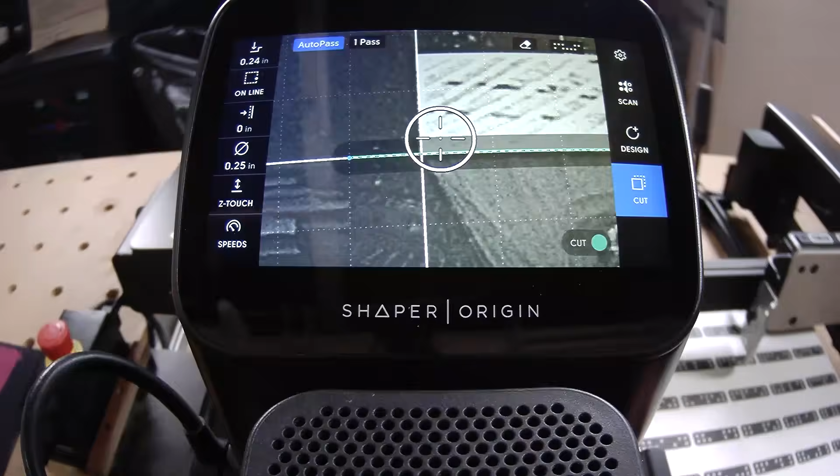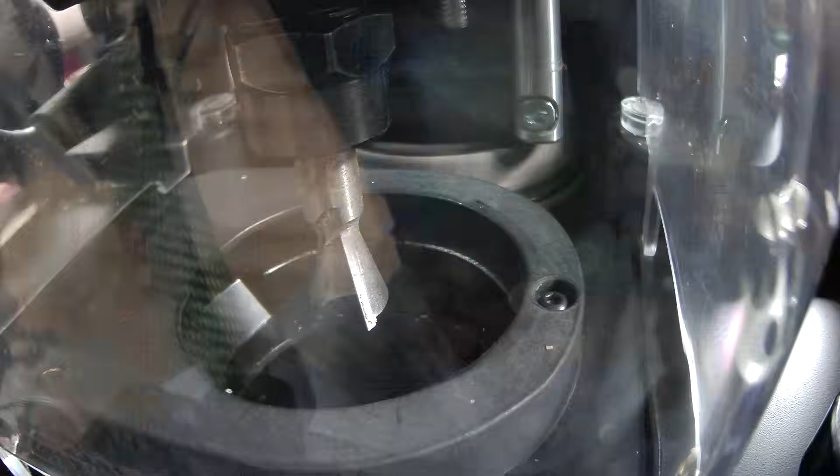All right. Got my dovetail cutter in there, but I'm just cutting on line. Yep. Always Z-touch. And then how deep are you going to cut this one? I'm going to go down 3/8.

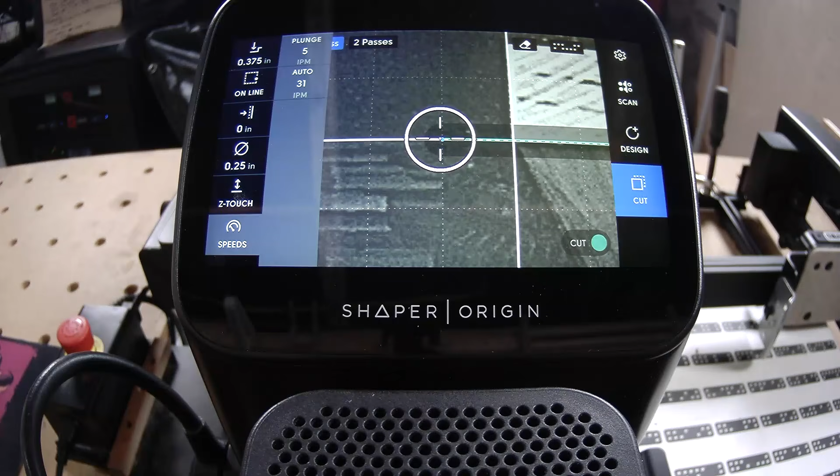Okay, 0.375. And one thing to note, this is just a little pro tip, but if you go to the speeds mode here, this plunge speed actually does affect your ramp. So especially if you have a much lower plunge speed, let's say 5 inches per minute instead of the standard 15, that ramp's going to take a lot longer. And so we're kind of exacerbating the issue here, but this will show and explain what's going to happen. So, Jake, I think you're ready to send it. Okay.

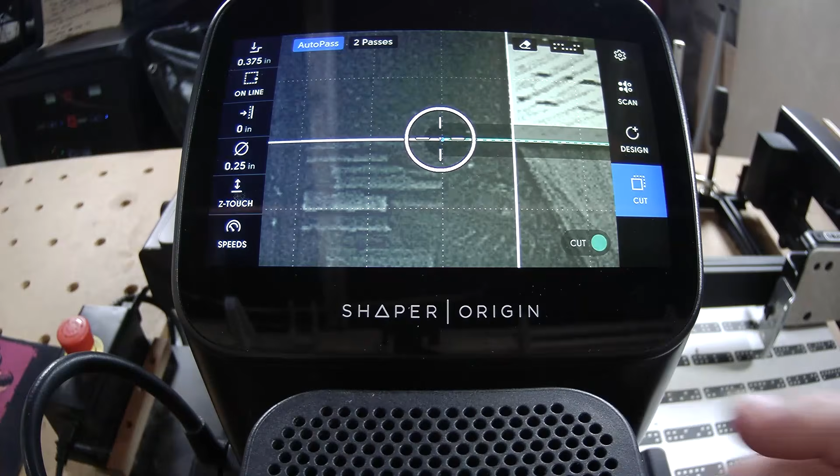Okay, so you're gonna see it's gonna go here. Oh. If you don't put Origin in BenchPilot, it will not automatically cut. All right, here we go. Round 2. Oh, actually, I think I screwed up, Jake.

It's all right. Open line paths automatically plunge already, so this only affects shapes that do not, I believe. That's great to know. Forgot about that little detail. So why is that? Great question. I'm blanking on the answer at the moment, but it is what it is. If we had a shape like a rectangle or a path that connected back on itself, then this feature would do exactly what we were trying to show.

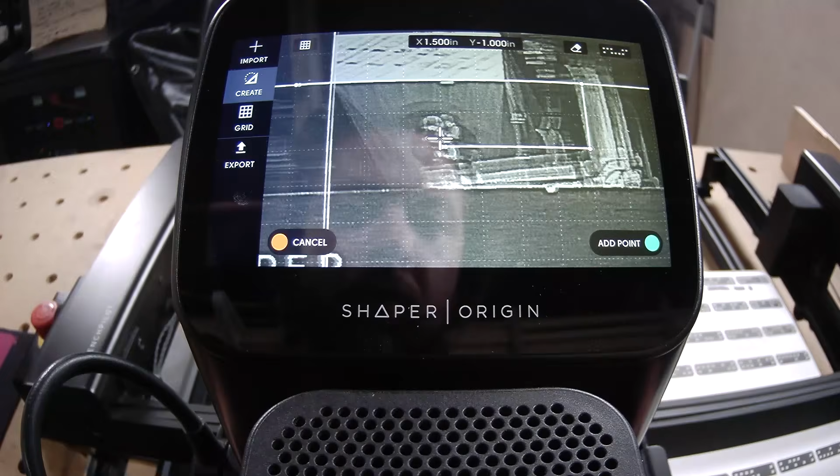Well, I'm going to go ahead and create a rectangle off of the front edge then. Okay. Here we go. Round 2. If you want, you could just make a polygon tool that closes on itself too. That would be one way to do it. And generally, if you're cutting dovetails, you would need a path that connects all the way through and loops back around.

Okay, cool. Let's run that. And then, Jake, as soon as it gets through that first piece, you can just stop it, because I don't even know if we'll get through that first ramp. I'm going to make this still an online cut. Yeah, that's fine. Online works. But I would start on the left side so we can show it a little more clearly. Yep.

Yeah, right there. It's going to go around. The cut. Oh, I see. It's going left. I thought it was going right. Okay. All good. Can't really see from here.

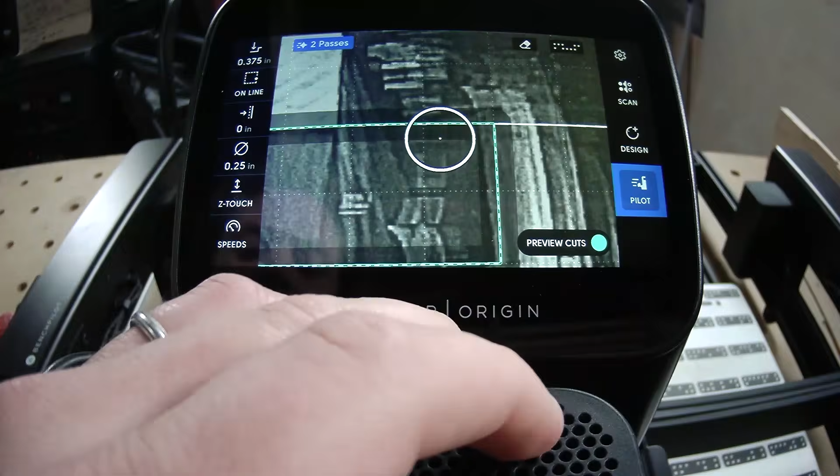Okay, so here you can see we're going to start this cut. And the light blue means we are ramping, right? And so now we're finally down to our depth. And Jake's going to go ahead and stop it here. Okay, so now we can explain and show, if we come to that top camera, what's going on.

All right, so you can see there, that ramp didn't have enough time before it got to the cut to actually complete. So we have kind of a failed cut here, because we need to be at depth before we start the cut. So Jake's going to put this back in, and then we're going to turn the pass depth feature off so that the ramping doesn't occur. And then we'll show you what happens there.

Jake, we made you do some work today, huh? I love it. Here for it. Me too. So fun to be showing all the stuff we've been working on. I mean, some of these things we've been working on for a long time, some less time. And it's really fun to be able to ship these releases to all of our customers and make Origin such a better tool than it was when I first joined this company 9 years ago.

All right, so Jake turned that feature off. Now, when that pass depth feature is off, no ramping is going to occur. And so what you're going to notice here, when he hits plunge, it's going to plunge, plunge, plunge, and see how the range circle is still going up, up, up. When we get to the final, then it's going to begin the cut. Okay. So it's basically already at depth before it starts moving. Okay, and then he can stop.

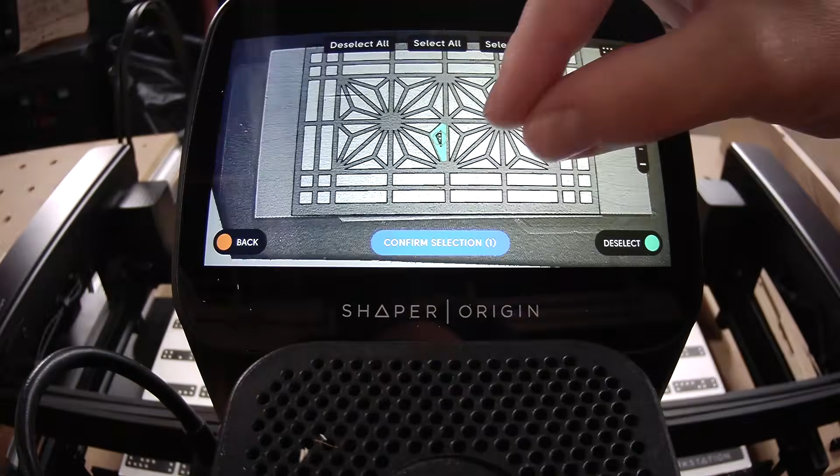But if you hit select uncut, boom, it'll select everything except that one because it's already cut. Nice. So now you can hit confirm in the bottom, hit go, and it'll just cut everything else for you. Pretty simple, small improvement, but quite nice when you're cutting a bunch of different stuff and using BenchPilot in a more interactive mode. You know, if you're just cutting everything with BenchPilot and you say select all and go, it's not really going to help you. But those cases where you're iterating through a project, cutting different offsets, cutting different depths, all that kind of stuff, it can be a little bit of a winner.

Okay, we have some other small little features, but instead of going to show you on Origin how it works, because a lot of them are under the hood stuff, I'm just going to open up this web page here, and we're going to come over to this computer. If you go to the Shaper Tools website, and you can either type this in, releases/origin, or just search software updates on Google for Shaper Origin. When we post new updates, you'll see them here.

And at the top, if you don't have Wi-Fi for some reason, you can download a USB file. But we normally don't update this right away because we want to update over the internet and make sure everything's good out in the field before we put it here. So right now, we're actually quite a bit behind. Monterey is the last thing available via USB. So connect your Origin to Wi-Fi and you'll have access to Oakland. If you don't have it for some reason, you'll have to download Monterey and install it over USB for the moment. But over time, that will be updated for newer and newer.